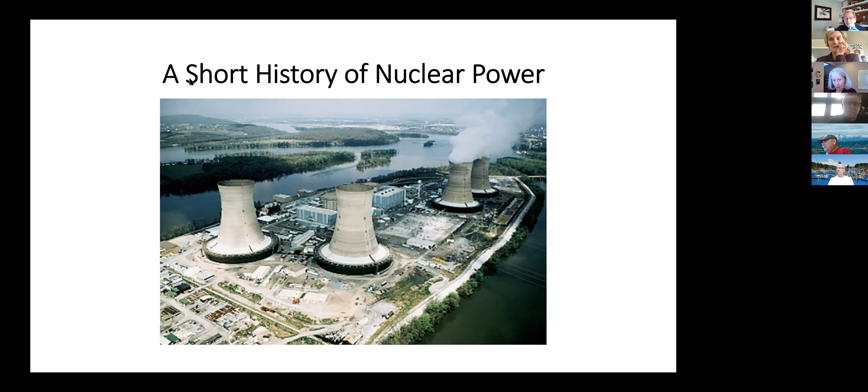Okay, so let's go, if I can hit, whoops, now why isn't it? I am trying to hit page down. Oh, there we go.

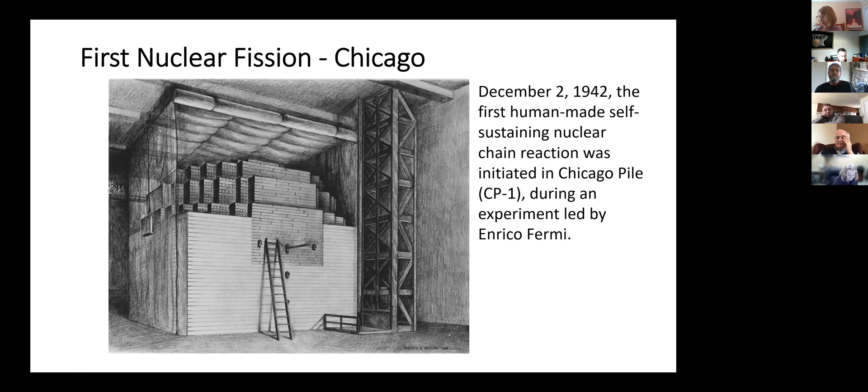So one comes in, the uranium atom splits, and then two to three neutrons go off and they interact with other uranium atoms. And so it keeps the chain reaction going. When the number of neutrons is balanced, we have a sustainable reaction. When it's out of balance and we don't have any controls, then we have a nuclear weapon.

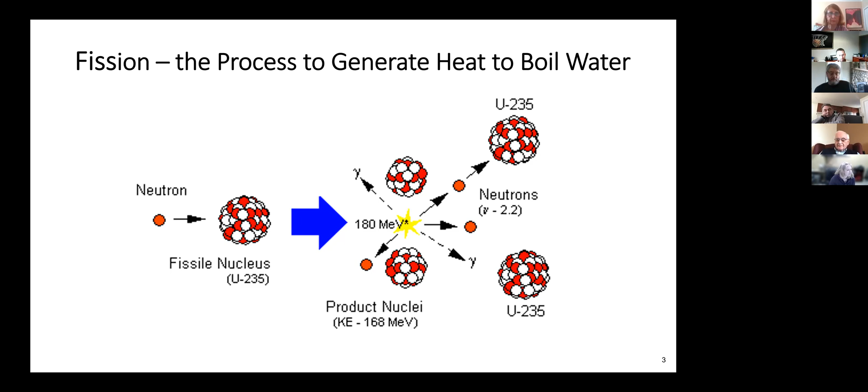So there's obviously a distinction between the two. When you want the chain reaction out of control, like we did at Hiroshima and Nagasaki, Japan, well, then you don't have any moderator, and you just let the weapon in less than a second do its horrible job that it was designed to do.

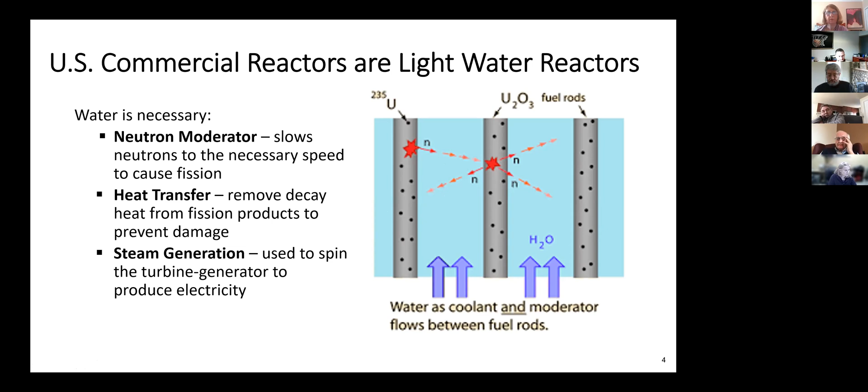This is uranium trioxide, the fuel rod. They're little pellets. I think maybe I have a picture of them coming up later. The other essential component here is heat transfer. And so this water that comes in serves two purposes. It cools, it removes heat from the reactor, and it also serves as a moderator. And so basically what this does is it generates steam that goes to a turbine generator to produce electricity. So we'll have a little bit more about that in a bit. But these are the three essential elements to having a nuclear power plant operate.

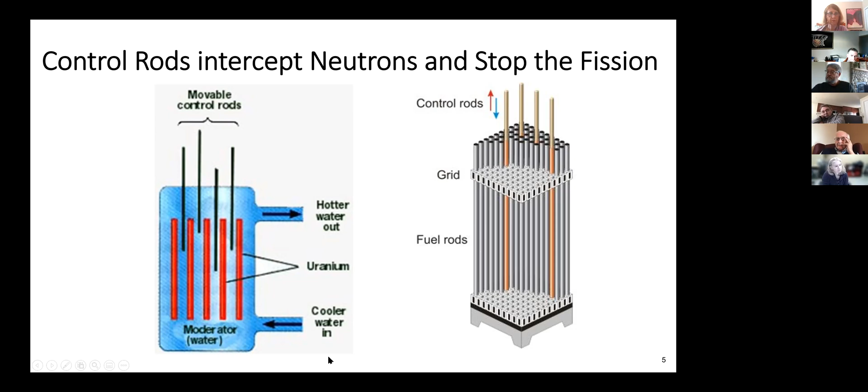And so a fuel assembly is depicted here. So we have these fuel rods that are in this assembly, and they're little pellets inside of these zirconium tubes that make up what's called a grid here. And so if we go down to the next one, when this uranium atom splits, this neutron comes in, it generates what are called fission products.

And so there are three categories that we normally think of in terms of fission products. We have what are called noble gases. And if you remember back to your high school chemistry, noble gases were those that don't interact with anything, like helium, neon, xenon, krypton. So there are some noble gases that are produced, and these noble gases are of interest because they're radioactive forms of the common noble gases. Then we have halogens also produced in these fragments, and this is radioactive iodine. And then we have radioactive materials in particulate form: radioactive cesium, rubidium, ruthenium, and numerous others.

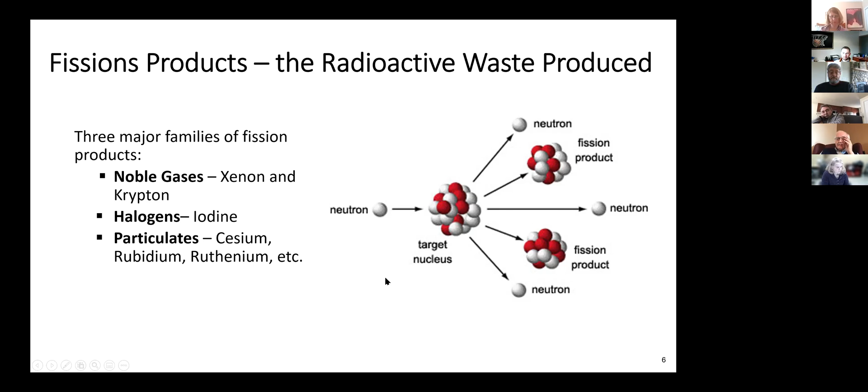Okay, so then to make sure that everything goes like we want it to, we need safety systems. And of course, there are multiple safety systems. We've referred to it often as an onion. So you peel a layer of the onion, and underneath is another safety system, and underneath that is another safety system. So it's defense in depth, is what it's normally called. And so we need multiple sources of water. And there's rule number 1: don't turn off the water, because that's what happened at Three Mile Island. And then rule number 2: simply see rule number 1.

So even when the control rods are inserted and no fission is taking place, the fission products produce decay heat that must be removed. So that's why, even if the plant is shut down, we need to keep water circulating through the core. And then we offload the spent fuel from the reactor, and we put it in what's called a spent fuel pool, and that continues to generate heat from the fission product decay. And ultimately, that gets to the point where we can actually remove them from the spent fuel pool.

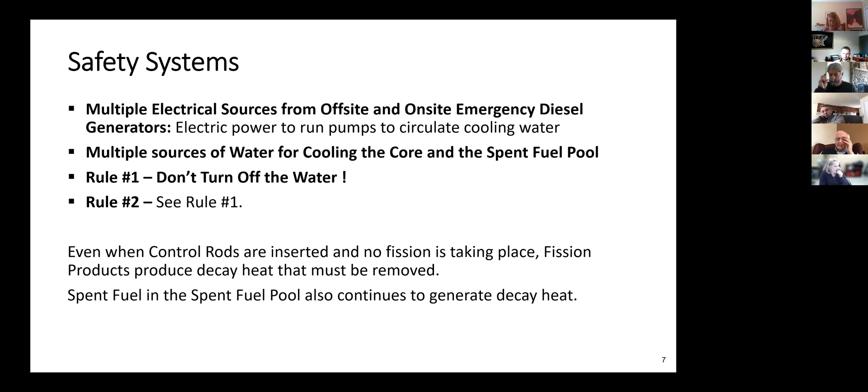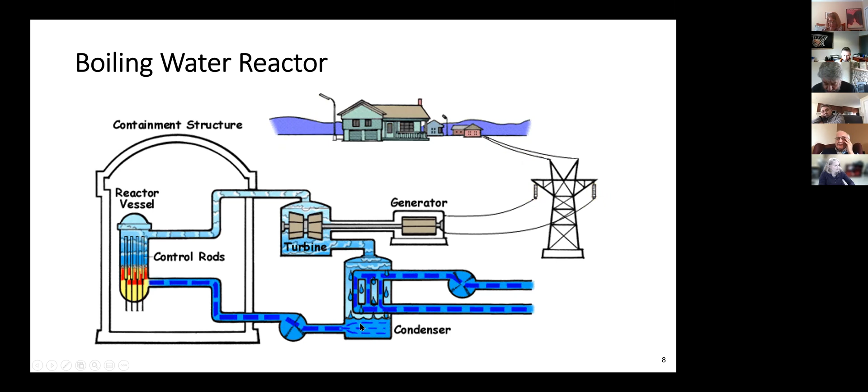And so this generates steam. You're actually just boiling water, and then the steam goes over to the turbine, turns the turbine, turns the generator that produces electricity that goes into the grid. And then this steam goes through a condenser and comes back as water, and we end up just kind of repeating the cycle. So it just kind of flows through the... I'm sorry, I jumped ahead inadvertently.

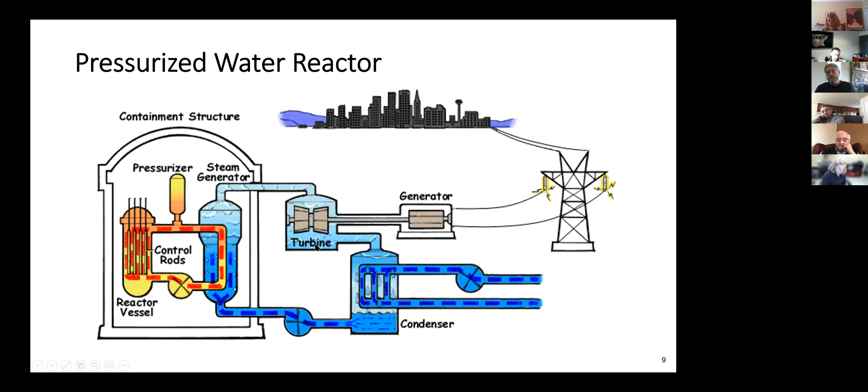And then the reactor coolant system is another barrier, and then the containment vessel that's outlined here. Those all serve to keep the radioactive material from being released to the environment. So we have various systems that protect the fuel cladding, protect the reactor coolant system, and protect containment. So that's basically the idea, to prevent an accident from happening, and if one does happen, to keep it under control. We make sure that we have very rigid defense in depth on each of these safety systems. And even if we lost two of them, we still have our containment that is designed to be basically a large pressure vessel that will contain the radioactive material.

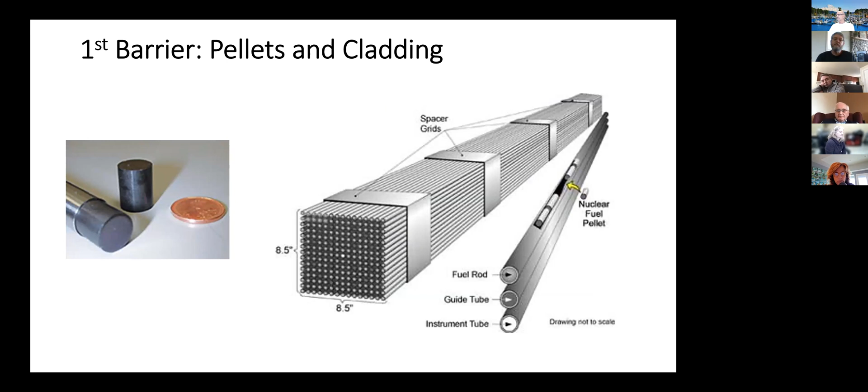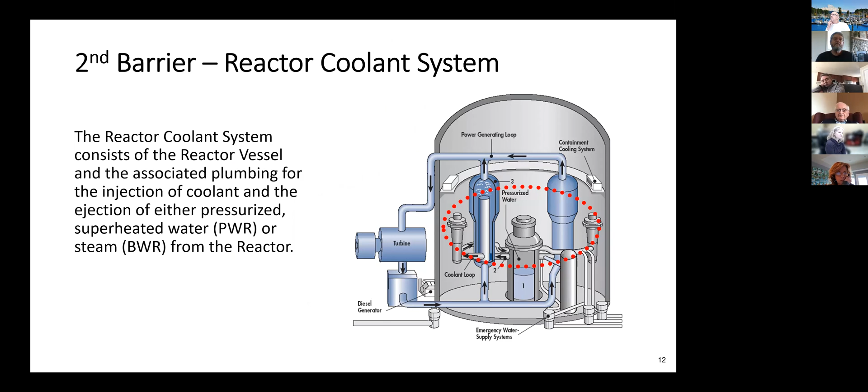So this first barrier, as I mentioned, you can see the size of the fuel pellet, kind of what they look like. This just shows a fuel bundle, which is a bunch of fuel rods that are in these tubes. Second barrier, the coolant system. There's a lot of associated plumbing, as it's referred to here, that injects the coolant, and then it removes the heat from the nuclear power plant. And then the third one, the containment. It's just a large vessel that surrounds the reactor. This here is depicted as the pressurized water reactor, of which there are 62 operating units in the US.

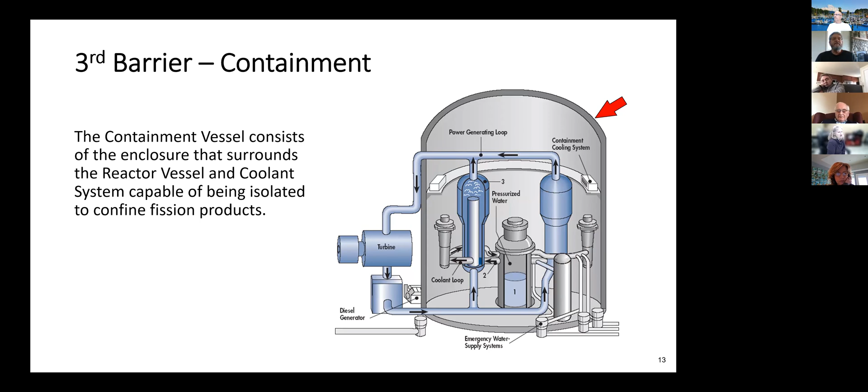And then we have the spent fuel pool. You see here there's lighting, but if you turn the lights off, you'd see a blue glow from the spent fuel, which is kind of interesting. I've seen that when the fuel is freshly discharged and put in the spent fuel pool. There's what's called Cherenkov radiation, named after a Russian, and it means that the radiation is actually exceeding the speed of light in water, and so it ends up with this blue glow. This is under 30 plus feet of water, and the water acts as a very good shield.

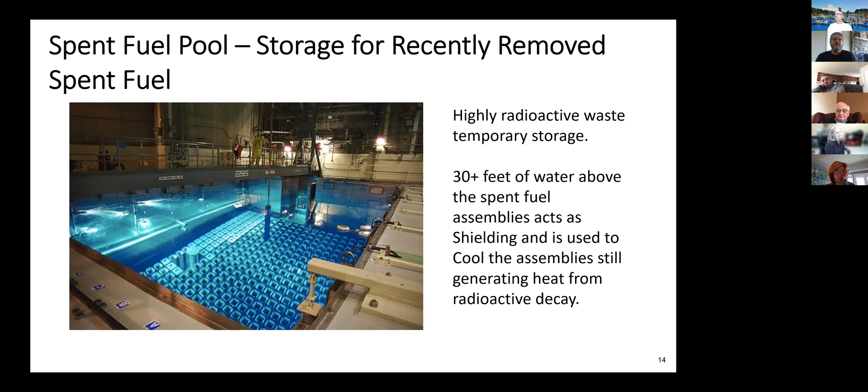And so you can actually walk around the perimeter of the spent fuel pool. Now, what happens when the fuel is removed from the pool?

We don't have an infinite capacity to keep spent fuel in the water pool. So after it's been there about 4 or 5 years, the decay heat has reduced enough to where it can be offloaded and stored in one of these spent fuel storage canisters that are depicted here.

Unfortunately, we don't have spent fuel reprocessing in the United States. During the Carter administration, they decided that the risk of reprocessing spent fuel to recover the plutonium produced during the irradiation process was too great, because we needed to safeguard the plutonium and keep terrorists from stealing it and making a nuclear weapon. So they decided the risk was too great.

The decision was made, and so now the only choice we have is to store the spent fuel in the assemblies that have the radioactive material. It actually has a long name, it's called the Independent Spent Fuel Storage Installation, this array here, or ISFSI as it's called for short.

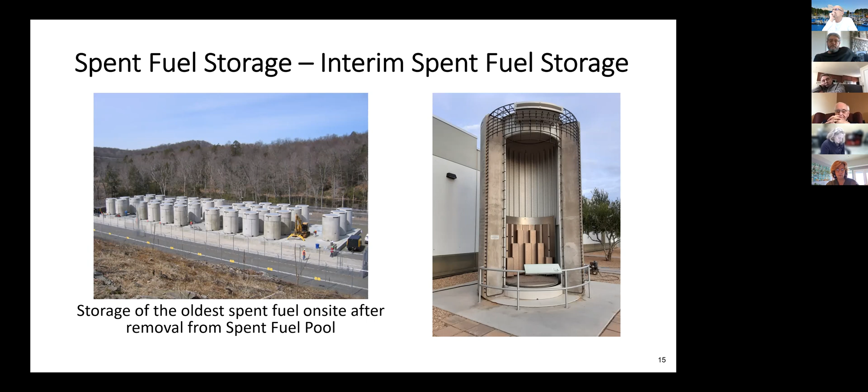These canisters have a design life of about 300 years, with concrete shielding and a steel liner. So sometime between now and 300 years from now, we're going to have to solve this problem, because these containers will be near the end of their design life.

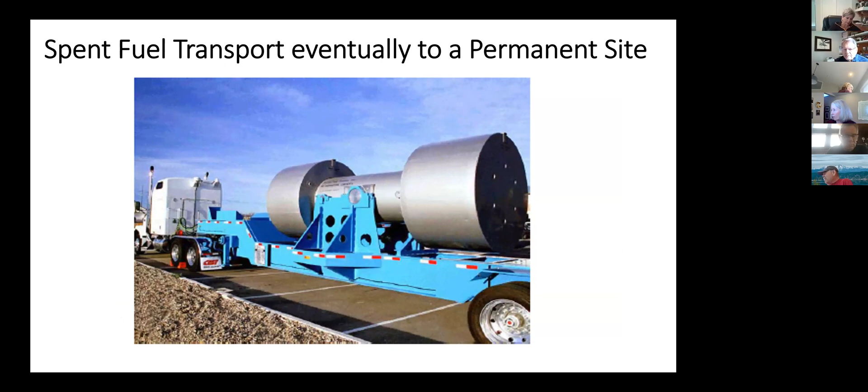This just shows how we transport spent fuel over land. This is an approved container called a Type B container, and these things undergo very rigorous testing.

I've seen video clips where this container on the truck is parked on a railroad track. They have a locomotive zooming toward it. It crashes into the spent fuel cask, and no damage is done to the cask. It literally goes airborne, but it comes down maybe dented here and there, with no damage to the contents.

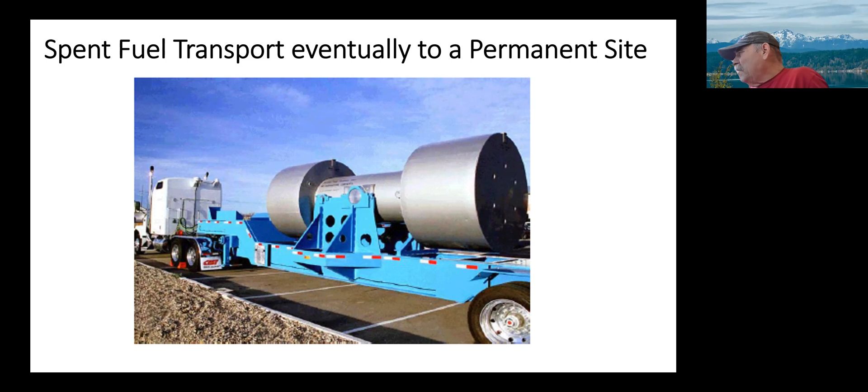So by law, there's supposed to be this site in operation in Nevada, but there's been enough obstructions, lawsuits, and what have you that have prevented it from receiving spent fuel. So it sits there basically unused, which is really kind of unfortunate, but that's the way we are.

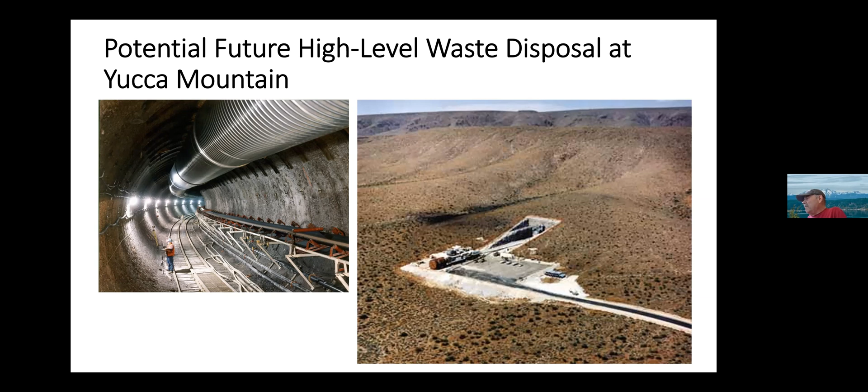There were two designs. One was going to be to seal it permanently after it reaches capacity. The other was to not seal it after reaching capacity, thinking it would take a while to fill, and then we could remove the spent fuel if we had reprocessing someday way in the future. So there were two options envisioned, but both are kind of moot points now because it sits there basically unused.

Okay, so let's talk about what goes wrong. 3 Mile Island Unit 2 - there were two units, as shown in the very first slide picture of 3 Mile Island. We had a mechanical failure and an operator error. In this case, the containment structure worked.

There were still some noble gases, which I mentioned earlier, that were released. My workstation, along with other people, was about a half mile from the plant as the crow flies, on one bank of the river looking down at the plant on day 2. We had our instrument on always, our Geiger counter in the trailer where we were working. When the wind was coming our direction, you'd hear the click rate on the Geiger counter increasing, and we knew we were being exposed to noble gases.

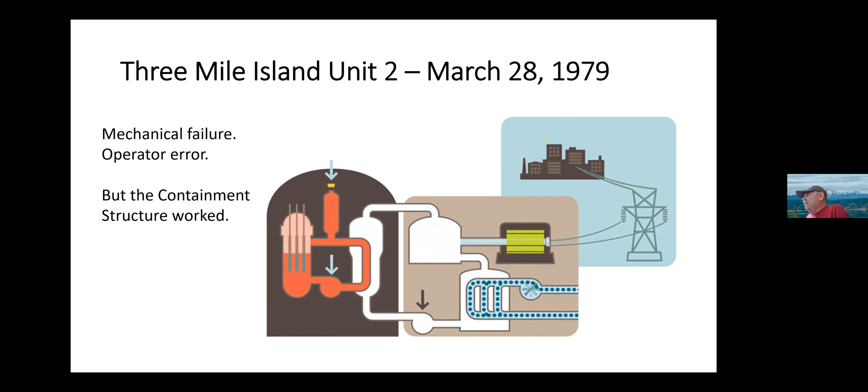So it was a low level but measurable amount of radioactive material being released to the environment. But the public dose limit was not exceeded at any location around the site. There was a lot of concern expressed, and a number of what-if situations were concocted, but in the actual accident itself, there was clearly a lot of damage to the plant, so it could never be operated again. The impact on the environment was rather minimal because it was within the public dose limit specified in NRC regulations.

Then a few years later, Chernobyl came along, Unit 4. You can see in this picture that the Russians at the time didn't believe in containment structures like we have in the US, where the building I mentioned earlier is designed to contain the radioactive material and operate at a certain pressure. But the Russians didn't believe in that technology - too costly. So they ended up doing some testing that got away from them, leading to a core melt. Because they used graphite instead of water for their moderator, they actually had a graphite fire.

So we have a big empty spot there where the building was. This gives a little narrative on what happened. There was a lot of radioactive material released because it was basically totally open to the air. On the roof of that building there were individuals - I think there were 32 of them - who ended up so exposed that they died from the radiation exposure.

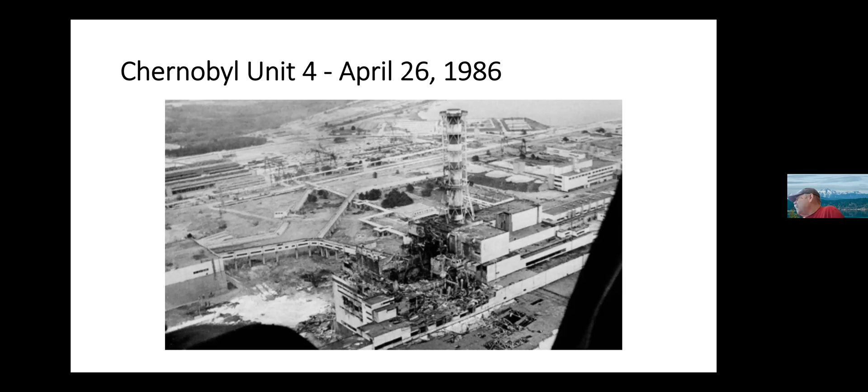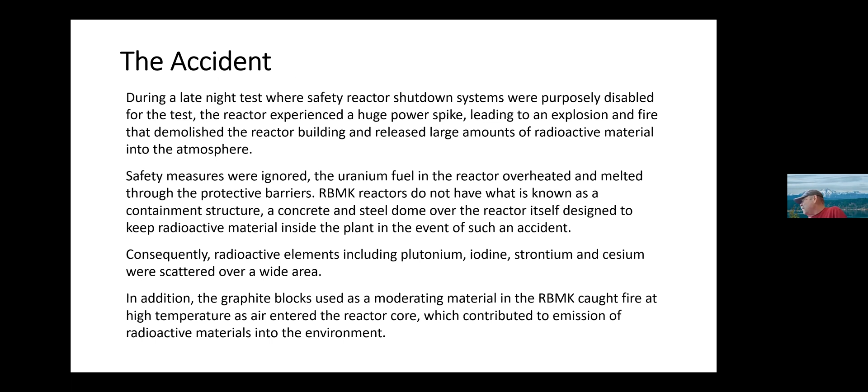So it talks about the graphite blocks used as the moderator - they caught fire as well. It was a flawed reactor design. There were 2 plant workers who died due to the explosion on the night of the accident, and another 28 people died a few weeks later as a result of what they were trying to do to keep water flowing in the plant. There were 350,000 people evacuated.

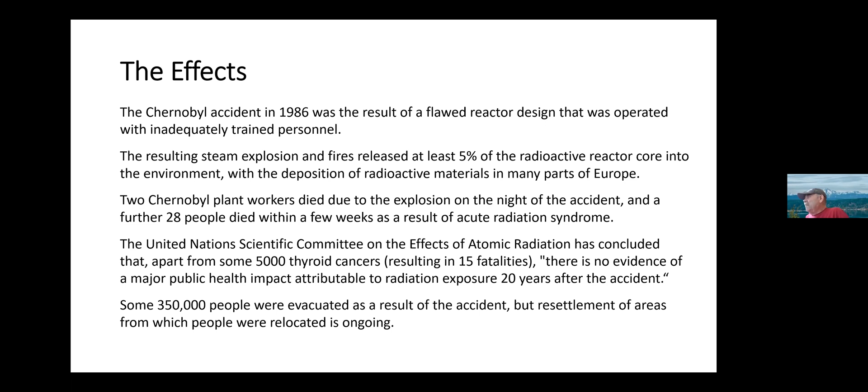There were 5,000 thyroid cancers produced because they didn't use what's called a thyroid blocking agent, or potassium iodide, which we now use. They had it at the time, in Belarus, but didn't use it. The government of Belarus didn't believe in using it because they were still tied to the Soviet way of thinking, so they didn't make it available to their population. As a result, a large number of thyroid cancers resulted.

And then most recently, we had the Fukushima Daiichi plant in Japan, and it ended up... here's where it's located. These were all the nuclear power plants in Japan, and those in South Korea are depicted over here.

Japan has quite a few nuclear power plants because they don't have any, or very little, natural resources, so they're dependent quite a bit for their power generation on nuclear power.

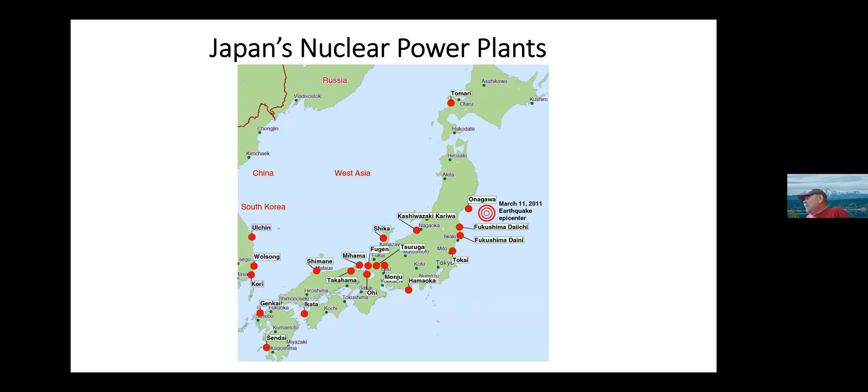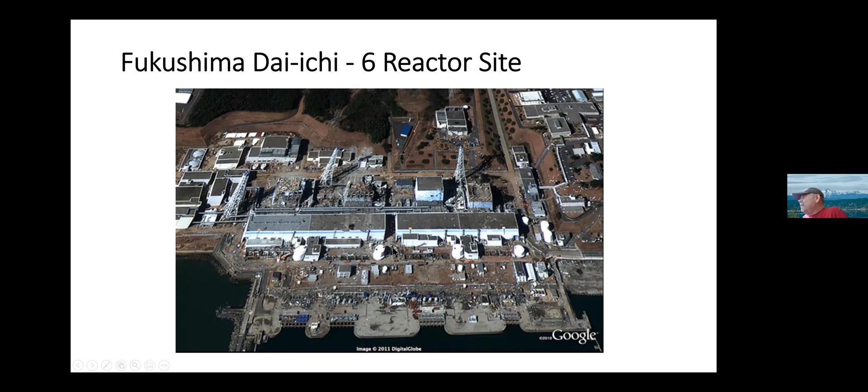The reactors there were GE boiling water reactor model, BWR3, which was in GE's system. The BWR1 was the first one they offered, and then the last offering was a BWR6. So this was about halfway through the evolution of the GE models.

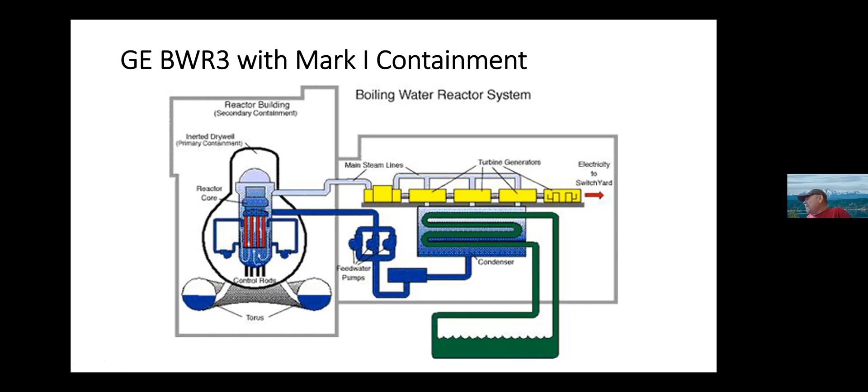So what happened here was they had a very large earthquake, which shut down the reactors. The problem is they lost offsite power.

And in the situation here, they had their spent fuel pool, and the diesel generators that provide emergency backup power were located at a level in the plant that they thought was well above any possible flooding that could ever occur in the future.

Had they located the diesel generators just a little bit higher, another level in the plant, the tsunami, the big wave that came in, would not have flooded the diesel generators, and the accident probably would have never happened, or at least it would have been much less severe.

But when they took out the diesel generators, they lost offsite power and had no option available to them, and they sustained rather significant core damage.

And so the lesson learned from that is to do a thorough evaluation of seeing what could happen. They thought they had bounded it adequately, but they didn't anticipate the tsunami of that magnitude.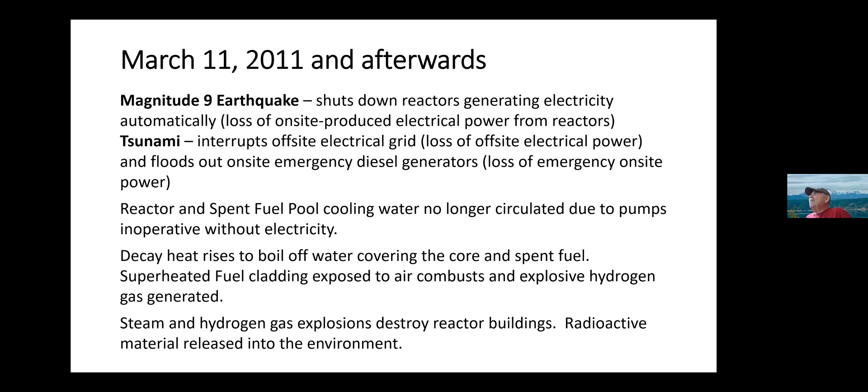And then they had to evacuate quite a few individuals.

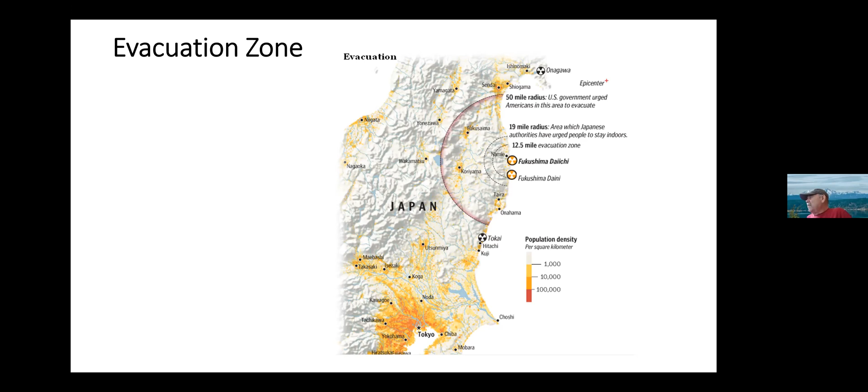We'll jump to future reactors. I think there will be a future. There's a company called NuScale that got its start down at Oregon State University with the nuclear engineering program. This is called a small modular reactor.

And this design is considered, not only by the company but by others that have reviewed the design, to be as inherently safe as you can get, meaning that if something happened and I couldn't get operator attention, the core will not melt.

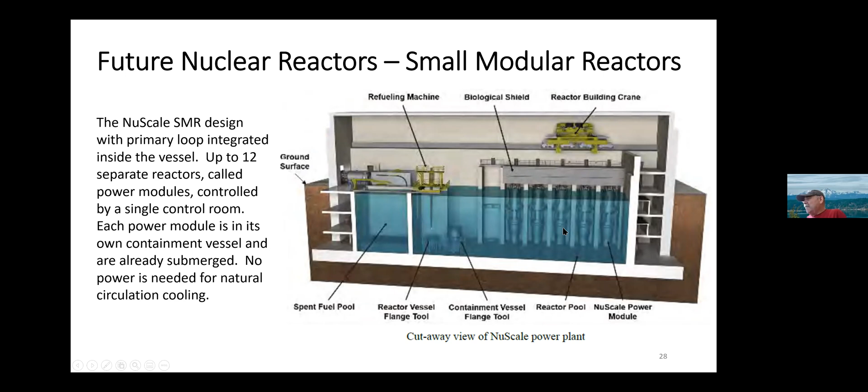So I have what's called natural circulation cooling. Even if I lost the ability to pump water through it, this natural circulation will keep the fuel adequately cooled.

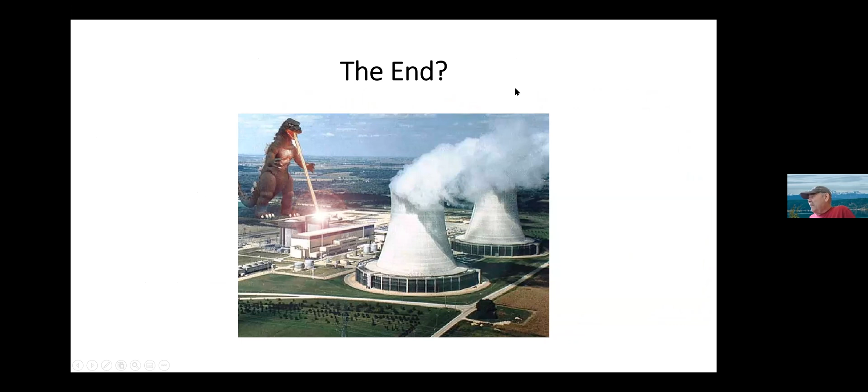Oh yes, we have our end slide here, Godzilla. That isn't my creation - the gentleman who created these slides that I'm using, that was his idea of the end question mark. So anyway, I'll leave the slides here in case there are any questions, and I can just flip back to any of them.

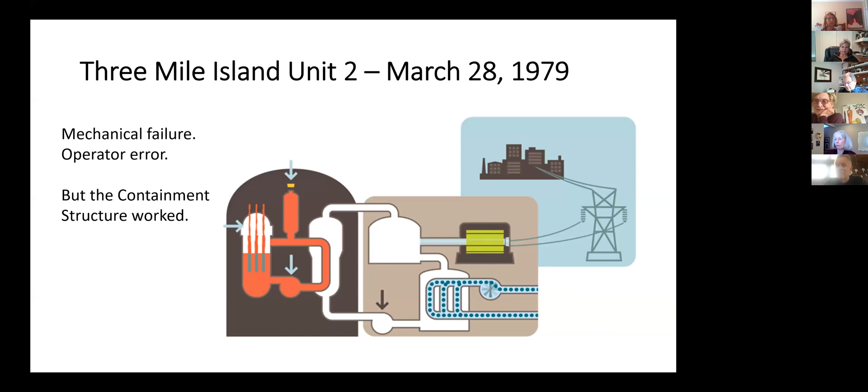So I'll kind of leave them there and open it up for questions if you have any. Please raise your hand if you have a question. And I realized it was kind of technical - I don't know how else to present the material. It's very technical material, but hopefully you got something out of it.

Very impressive, thank you very much. I learned something, definitely.

Gunda, I have a question. Go ahead. Okay, what is your opinion of the possibility of a disaster in Chernobyl in Ukraine?

I kind of figured this question would be coming. It's a natural question to ask. Ukraine has several operating nuclear power plants.

I don't know if I could speculate what the Russians are going to try to do, or why they would want to. I think if they did anything to the Chernobyl plant, it has a large containment structure around it that keeps the radioactive material inside. I don't know if they would want to attempt to breach that structure, blow a hole in it or something, just to frighten the population to make sure they evacuated from the area. I don't know what motivation they would have to do anything to the Chernobyl plant itself.